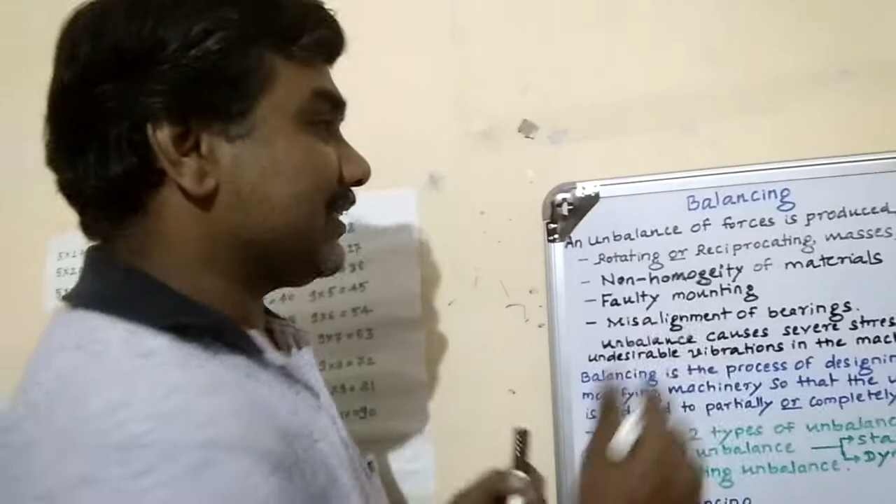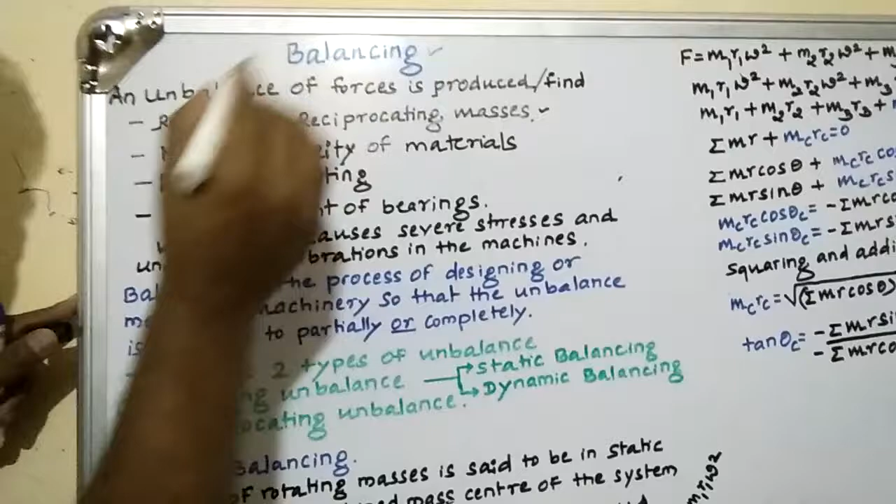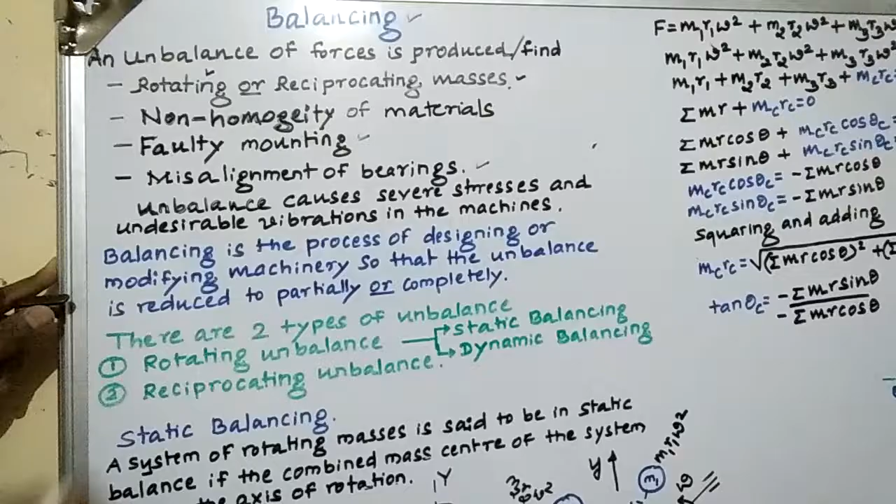An unbalance of forces is produced. We can find unbalanced forces in rotating or reciprocating masses, in both rotating and reciprocating masses. This is due to non-homogeneity of the material, that is also called unbalance. Then faulty mounting also causes unbalance. Misalignment of the bearings also causes unbalancing forces in the system.

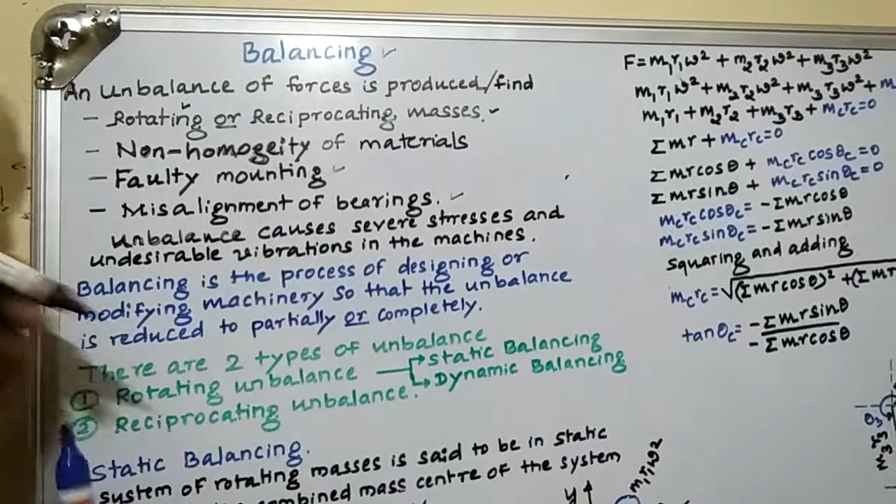Due to unbalance, it causes severe stresses in the system, and undesirable vibration in the machine. These are the main effects on the system due to unbalance - it creates stresses and it creates vibration in the machines.

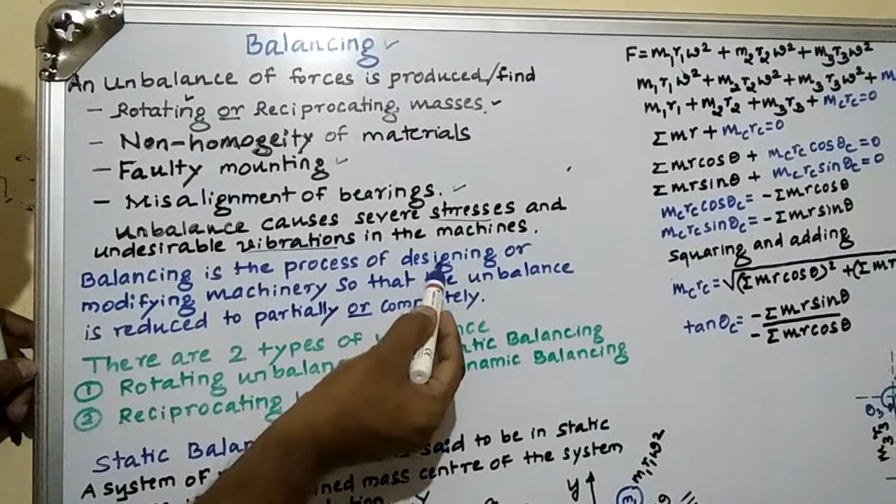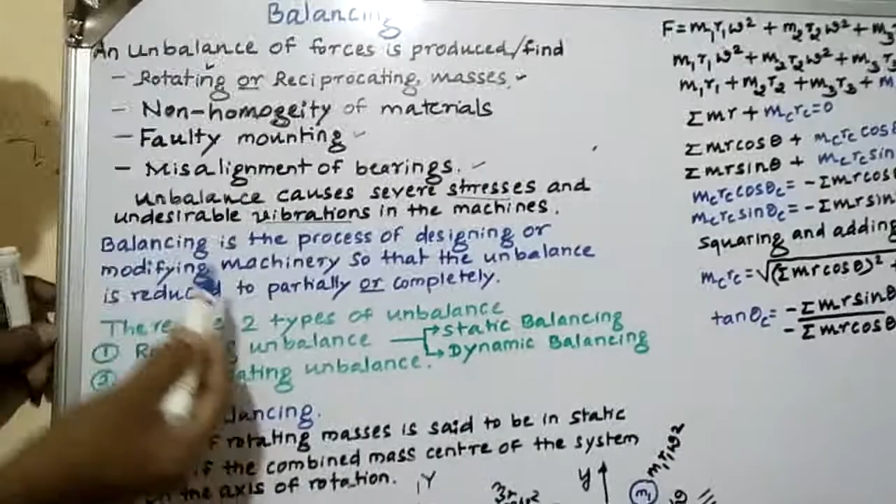What is the meaning of balancing? Balancing is the process of designing or modifying the machinery so that the unbalance is reduced partially or completely. As we cannot eliminate the total unbalance in the system 100%, we can only partially balance it. Some say we can balance the system completely also, some say this is partial.

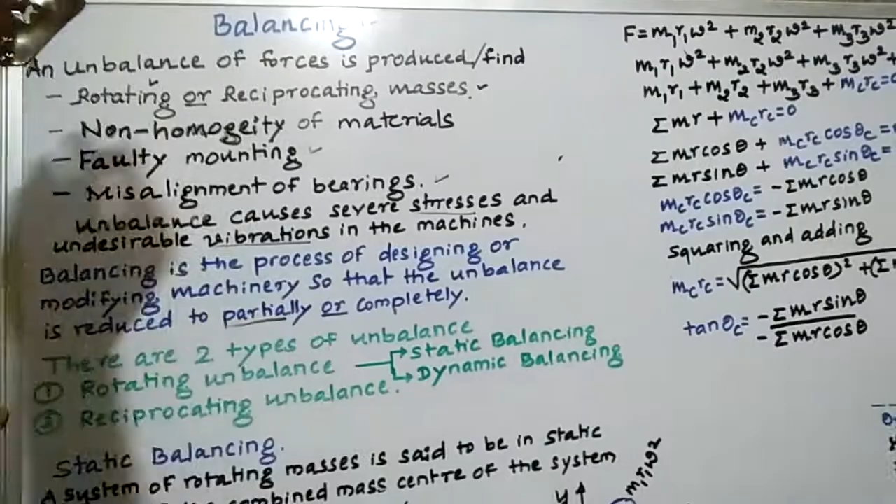There are two types of unbalancing. First one is rotating unbalancing. In that case, there is further classification - static balancing and dynamic balancing. Then one more classification is reciprocating unbalance. So in rotating unbalancing, there are two classifications, static and dynamic.

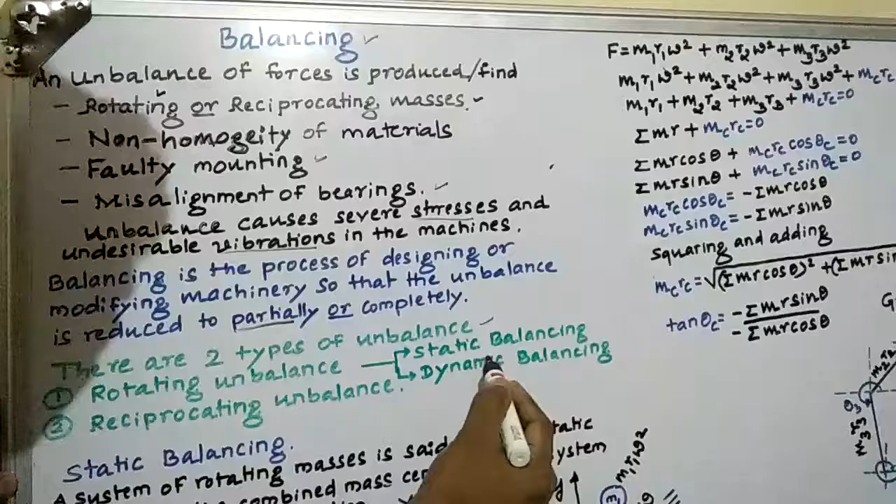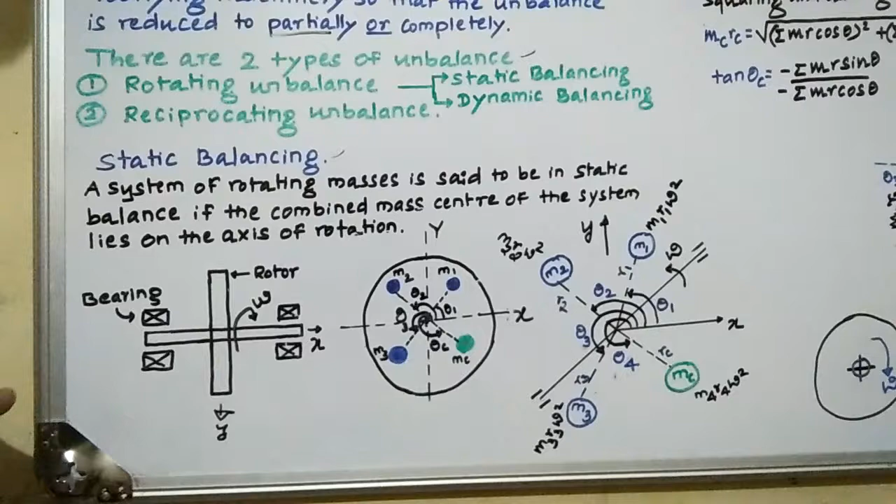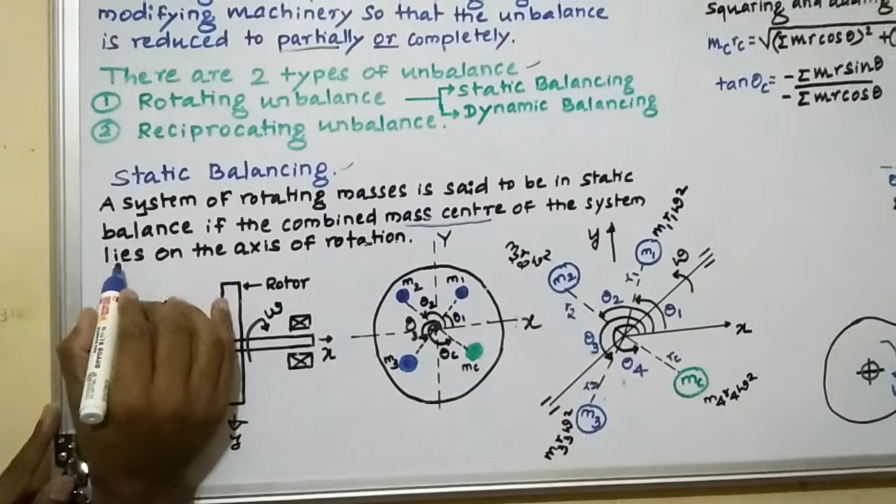What is the meaning of static balancing? A system of rotating masses is said to be statically balanced if the combined mass center of the system lies on the axis of rotation. In that case, we find two parameters - first is the mass center, and the second is that it lies on the axis of rotation.

When both are in the same axis, meaning both lie in the same axis, then you have to say that is static balancing.

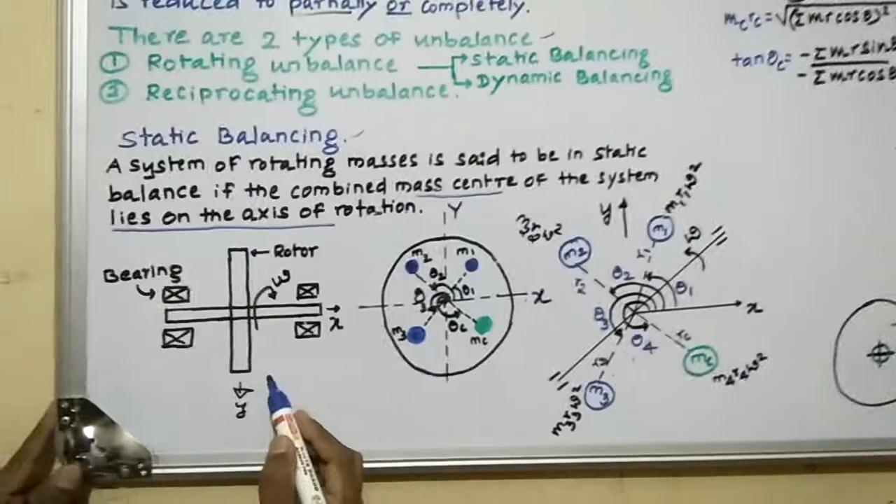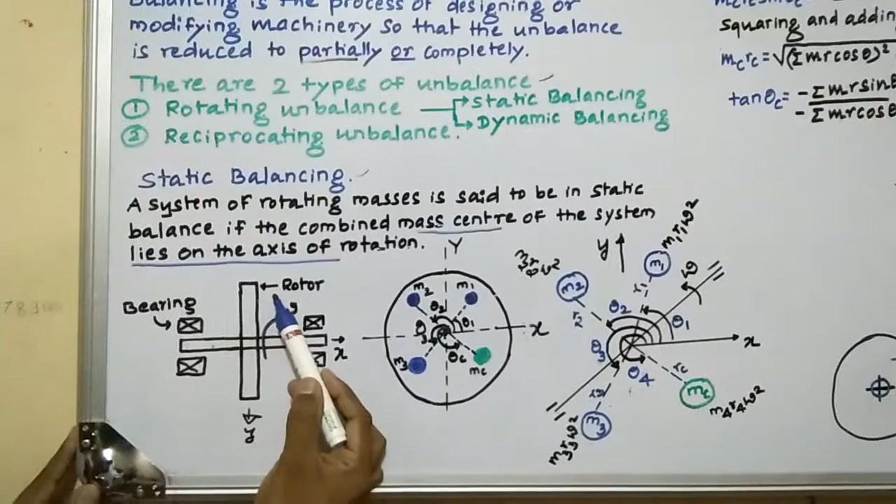Then I have taken a figure here. Look at this figure - I have taken this as a shaft, it rotates with a speed of omega. Then I have taken one more rotor, the speed is omega for this. At the end we find the bearing.

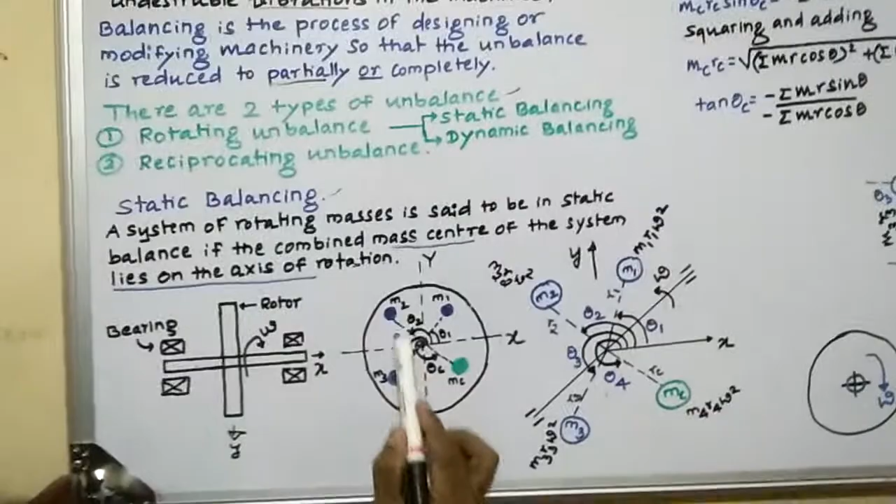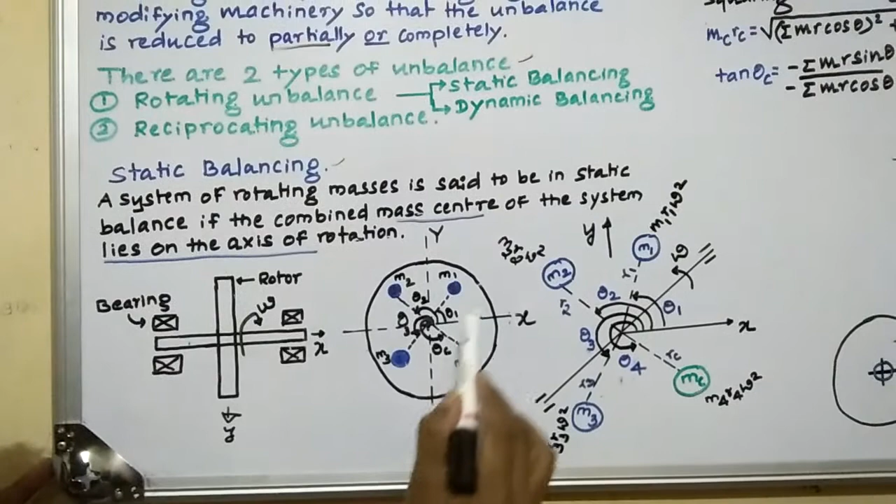Then I have taken a sectional view here. I have taken this as M1, M2, M3 - these are the extra masses we find in the rotor. Due to M1, M2 and M3, it creates an unbalance in the system. If it is unbalanced in the system, it again affects the bearing, causing an effect on the bearing, and finally the loss of the bearing will take place.

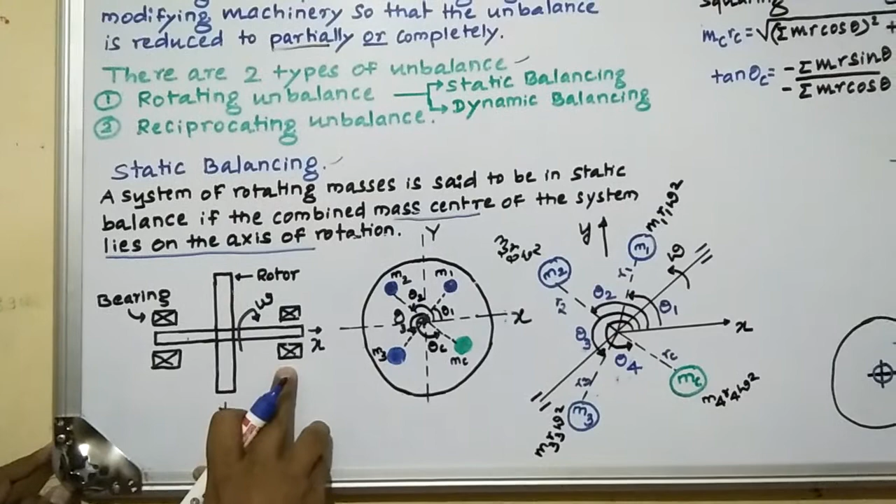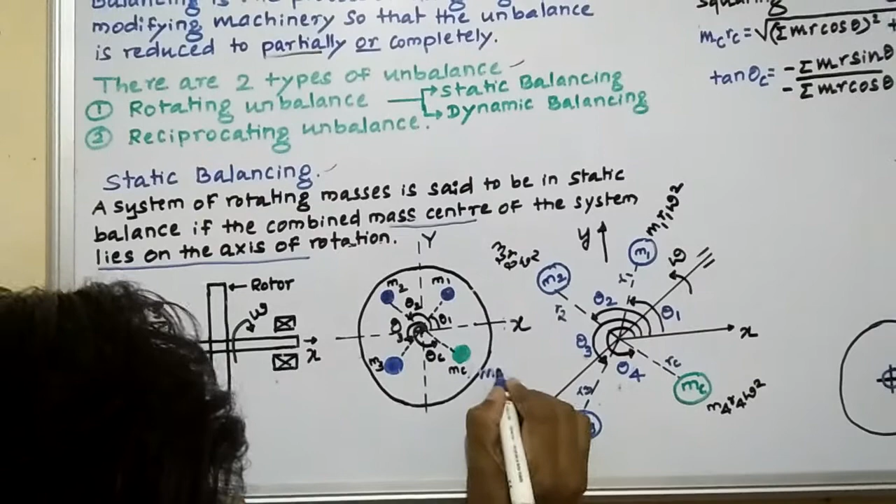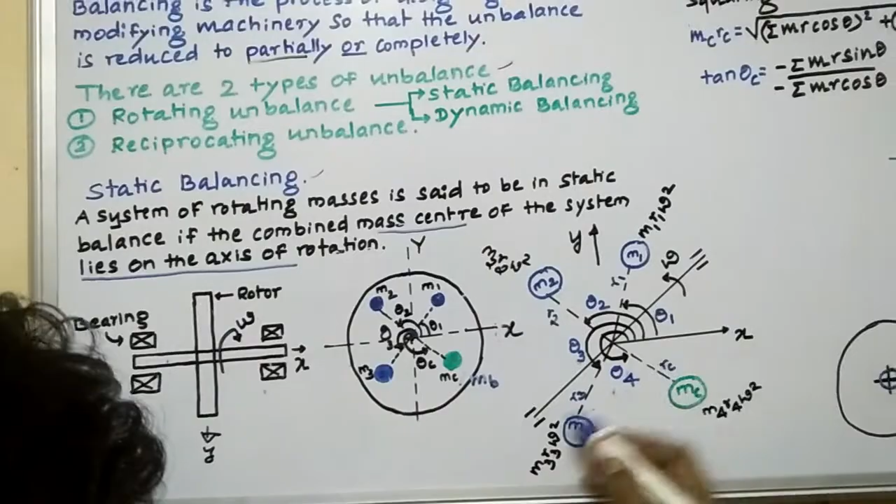In this case M1 is kept at a radius. I have taken a skeleton diagram here. One more thing, I have taken as MC - this is a counter mass, that is a balancing mass, also called MB, balancing mass. I will show some possibility here in this skeleton diagram. This is a bearing, at the end we find the bearing.

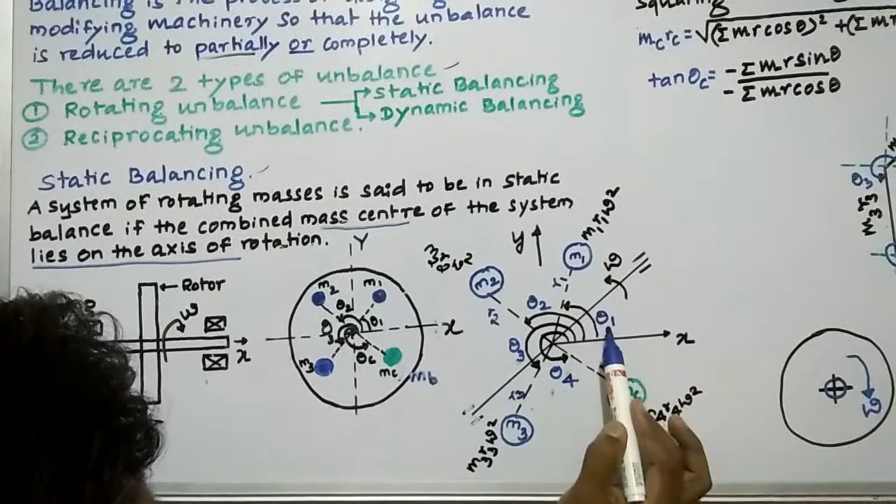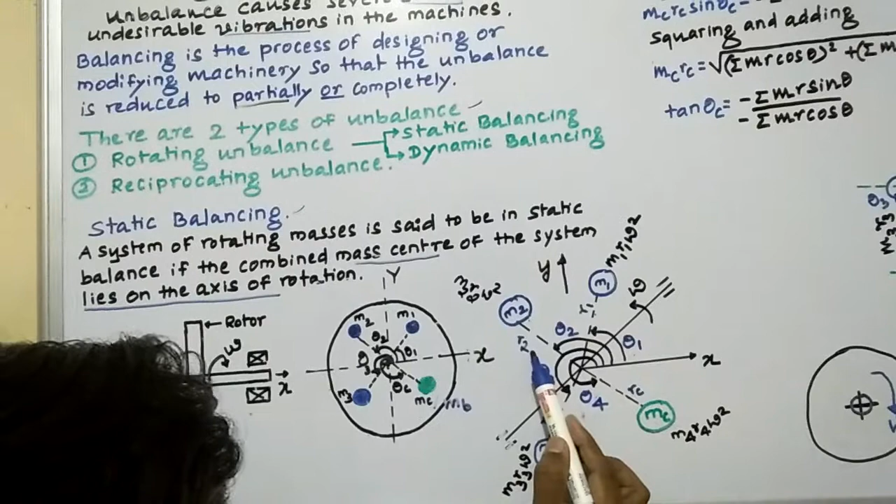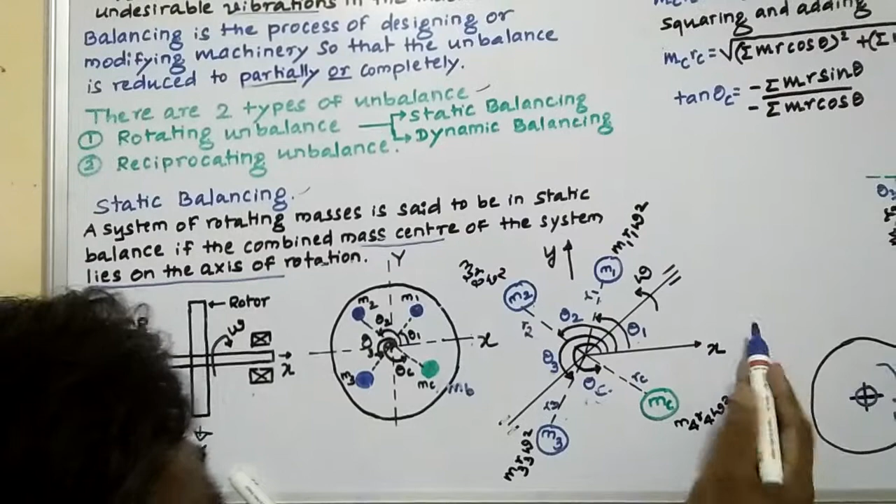I have taken some inclination to show the angle properly - M1, M2, M3, and the balancing mass or counter mass I have taken as MC. Look at this - the position of M1 makes an angle of theta 1 at a distance of R1. For M2 also, at a distance of R2, it makes an angle of theta 2. The third mass makes an angle of theta 3 at a distance of R3. The counter mass I have taken as theta c, at a distance of RC, with respect to the x-axis from this zero point.

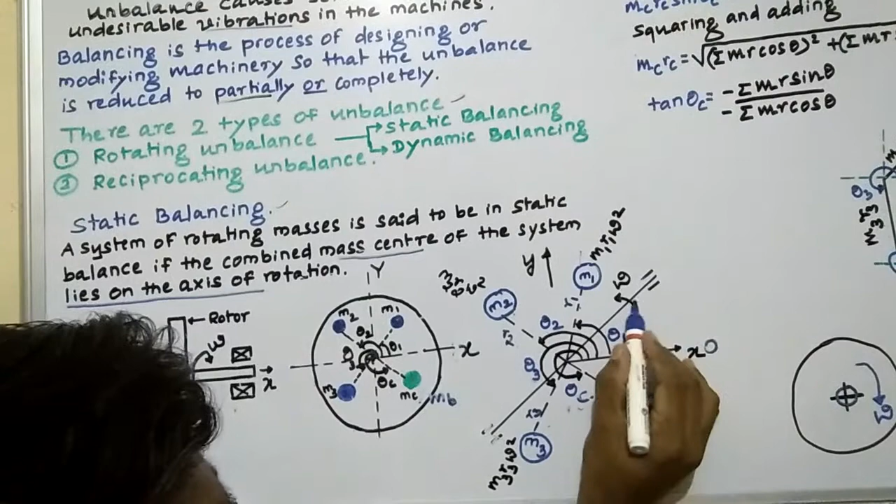Due to unbalancing, this is due to inertia force - this is rotating with a speed of omega, it will create a centrifugal force, that is M1 R1, the centrifugal force formula is MR omega square. For specific mass M1, M2, that is R1 omega square, the speed is the same so I have taken omega only. For M2 also, it will create the centrifugal force, that is M2 R2 omega square.

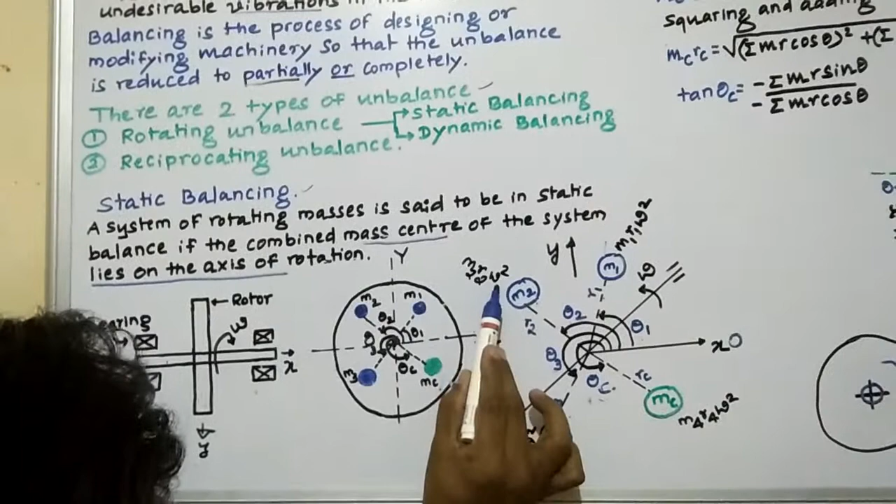Third one, that is M3 R3 omega square, this will also create a centrifugal force. Okay, then I went for this direction. This is the force. How many unbalanced forces have I taken here? F equal to sum of all the forces.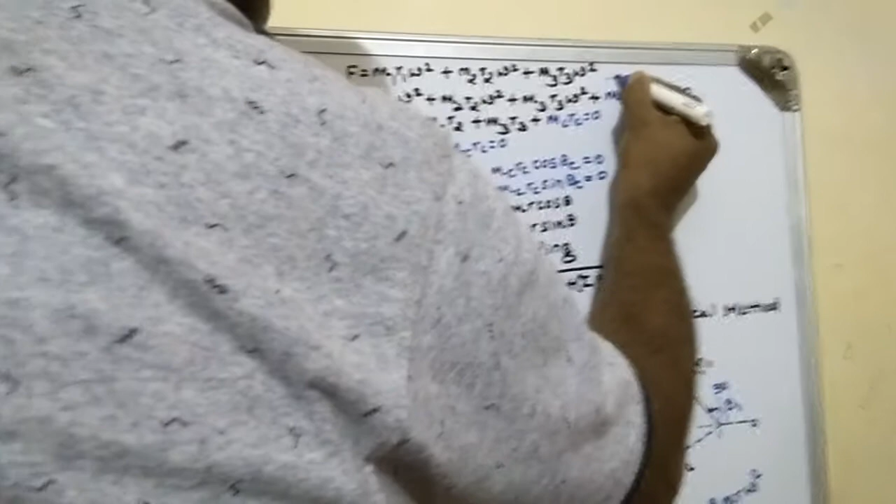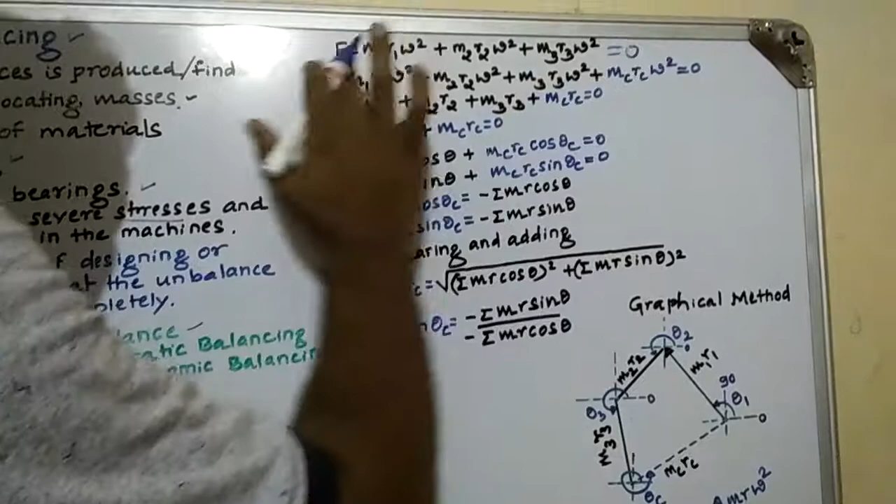If the sum of all the forces is equal to 0, it need not find the unbalancing force because the system is balanced. It is not necessary to go for the sum of the force equal to 0 to say that the system is balanced.

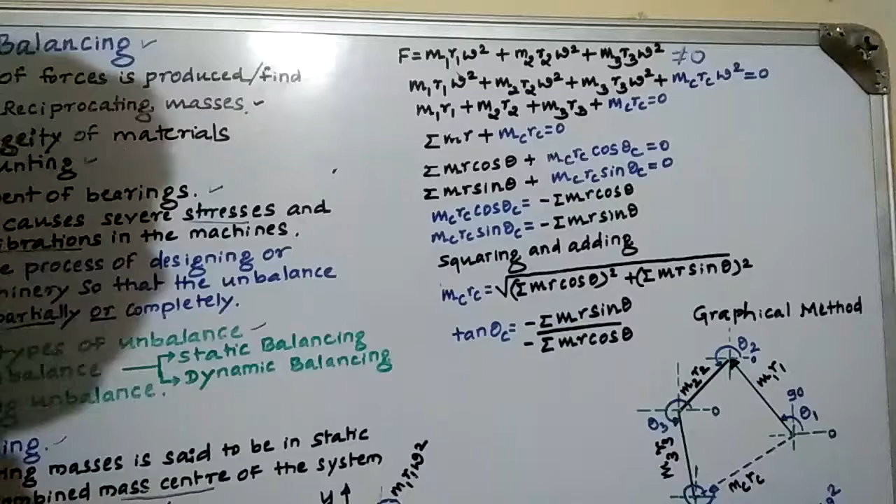If it is not equal to 0, you have to balance the system. In order to balance the system, you have to add weight, otherwise you have to remove material.

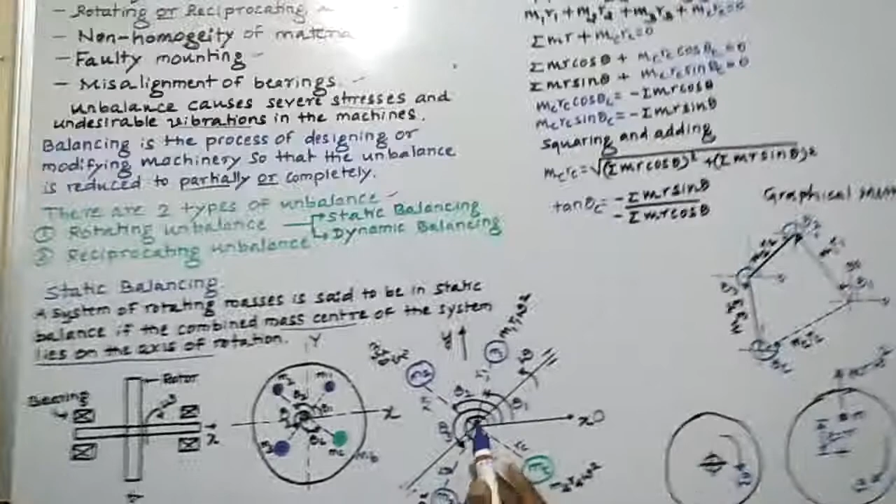In this case, look at this one. In order to balance this, I have taken a counter mass MC at a distance of RC at an angle of theta c.

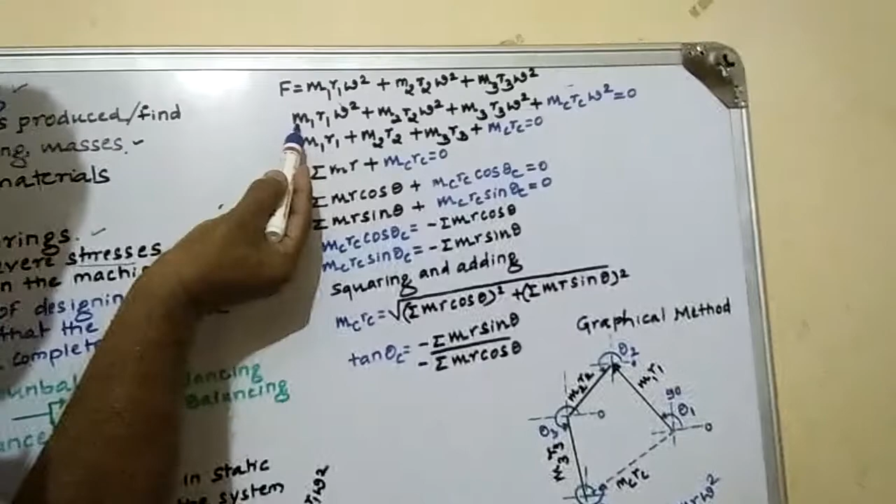Then look at the second equation. This is initially unbalanced, it is not equal to 0. Then how to make it equal to 0?

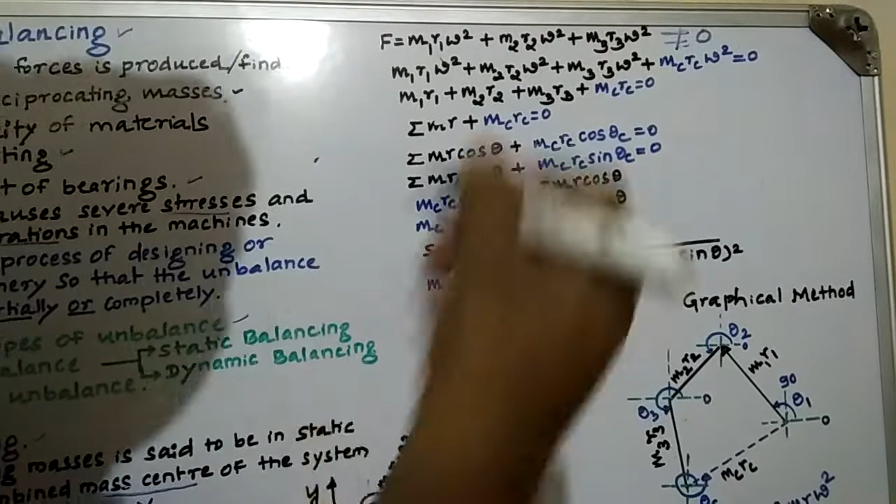You have to take some counter mass. I have taken a counter mass as MC RC omega square. Then it becomes equal to 0. Why is it equal to 0?

Because these three masses are the unbalanced masses. In order to make a balance, they are balanced by taking a counter mass MC at a distance of RC. Then it becomes 0.

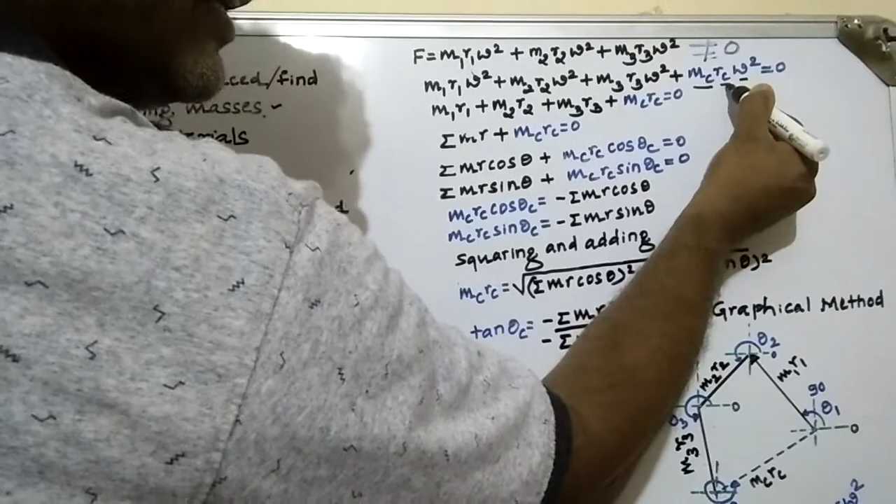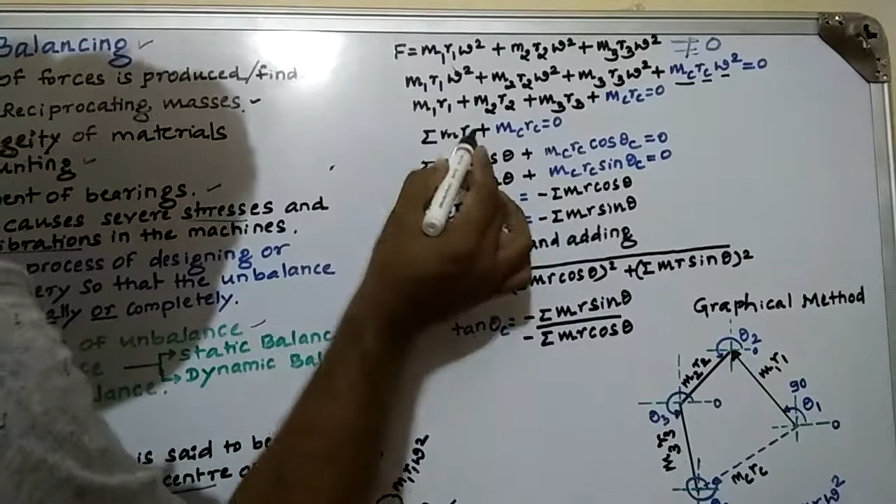Then look at that one. Omega, the speed, is common, so I have eliminated that. Then this is M1, M2, M3. I have taken the summation, that is summation of MR. The counter mass is a single one, that's why I have taken MCRC equal to 0.

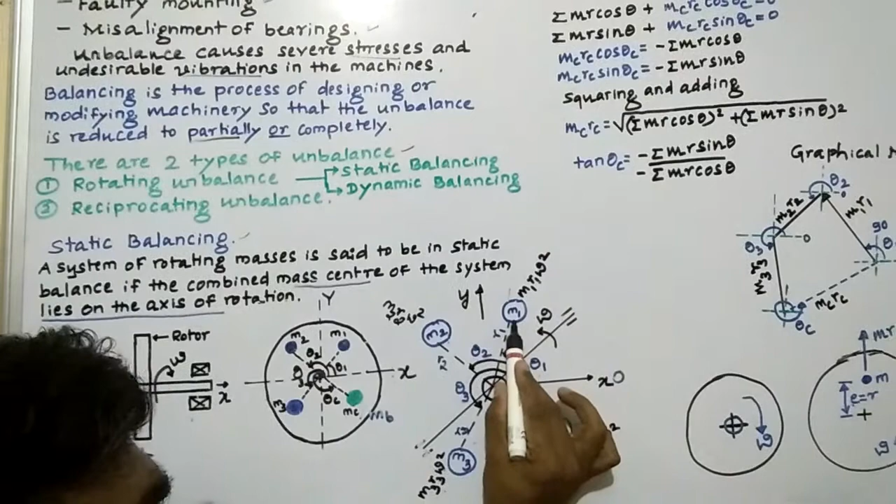Look at the figure, this is a skeleton figure. This is the x-axis, this is the y-axis. Mass M1 you have to resolve into vertical and horizontal direction. M2 also you have to resolve into vertical and horizontal direction. M3 also you have to resolve into vertical and horizontal direction.

That's why the counter mass also you have to resolve into vertical and horizontal. That's why, for the horizontal, I have taken the product of MR into cos theta. This is also for the counter mass, I have taken cos theta c.

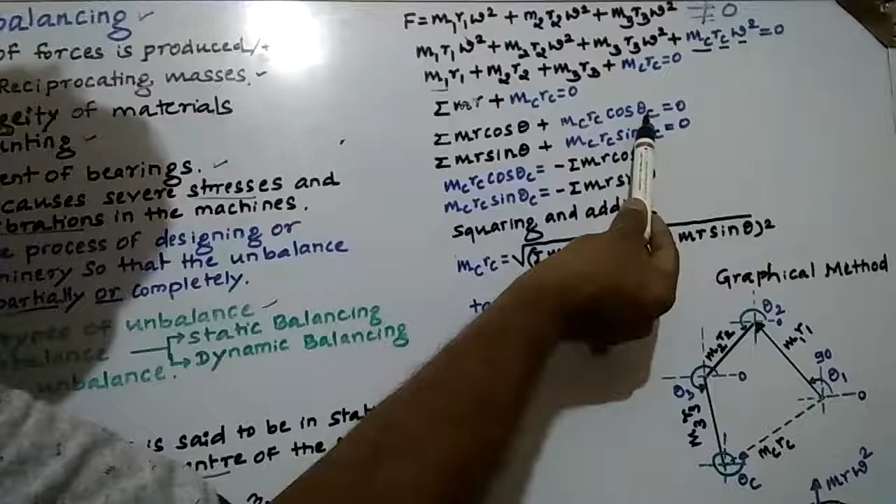Theta c is nothing but the angle subtended by the counter mass. This I have also taken in sin theta, and the counter mass is done in this way.

Then I have taken this as the right hand side, that is the summation of the masses on the right hand side. The next step is squaring and adding.

We square and add, and the minus minus goes away. Then finally this also comes as a square. Squaring means this product also comes as a square, this also comes as a square. Then cos square theta, sin square theta comes as 1.

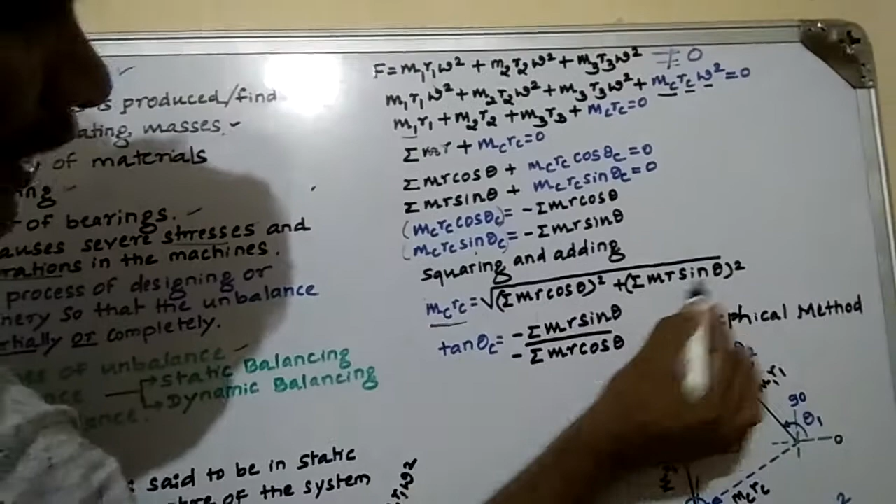Here also this becomes, the remaining is MCRC. Then MCRC, the square will be there, it comes under the square root of summation of MR cos theta whole square plus summation of MR sin theta whole square, under the root.

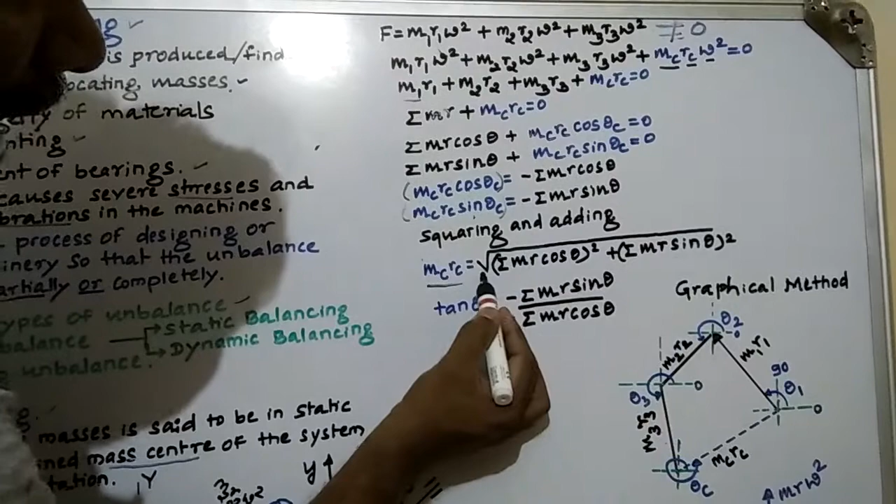For the angle, in order to determine the position of angle theta c, you have to go for tan theta equal to sin theta divided by cos theta. Sin theta is as usual MR sin theta, then MR cos theta, it comes. These two signs you need to determine the quadrant, that is the position, which quadrant that comes.

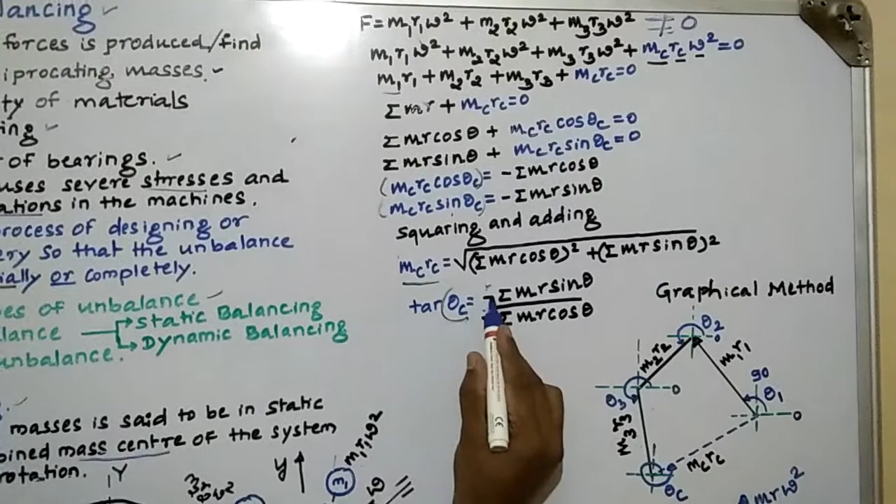That's why you have to keep this minus. In order to determine the position, you need the minus. Okay, then this is the solution I went through, this is the analytical method.

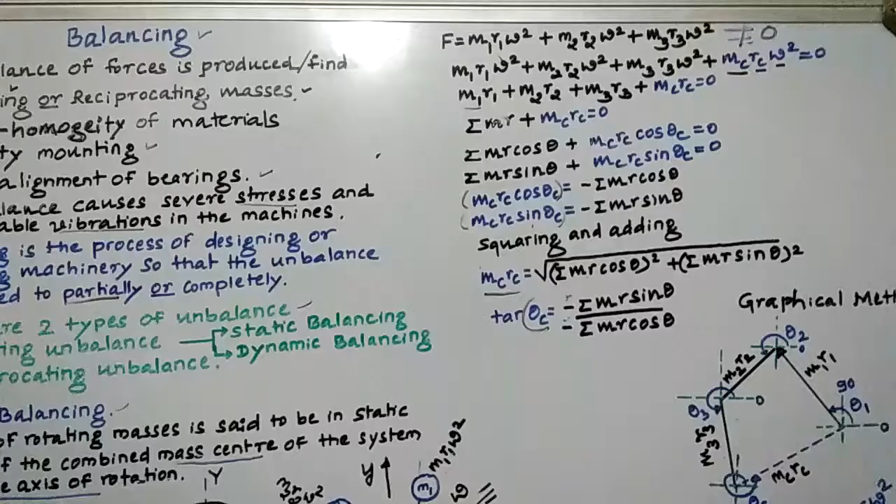Static balancing we can solve by two methods. One is the analytical method, one is the graphical method. In graphical method, look at this one, we'll get the same result.

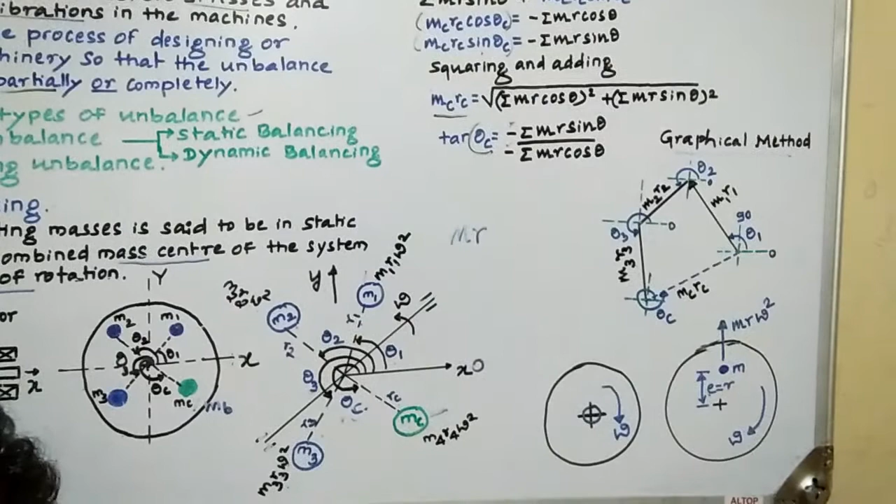Look at that one, you have to find the product MR, that is the mass of the unbalanced mass. You have to find MR, that is M1 R1, M2 R2, M3 R3, all the unbalanced masses you have to calculate. If it is M1, I'll draw here only M1 R1, this is M1 R1, it makes an angle of some theta, theta 1.

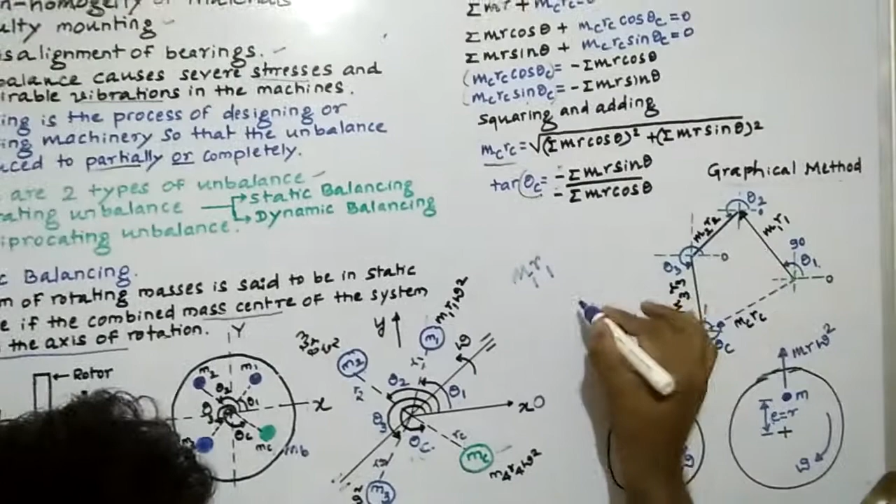Okay, you got some theta 1. Then M2 R2, I have taken here also, this also makes some angle, this is M2 R2. You have to draw it with the respective angle.

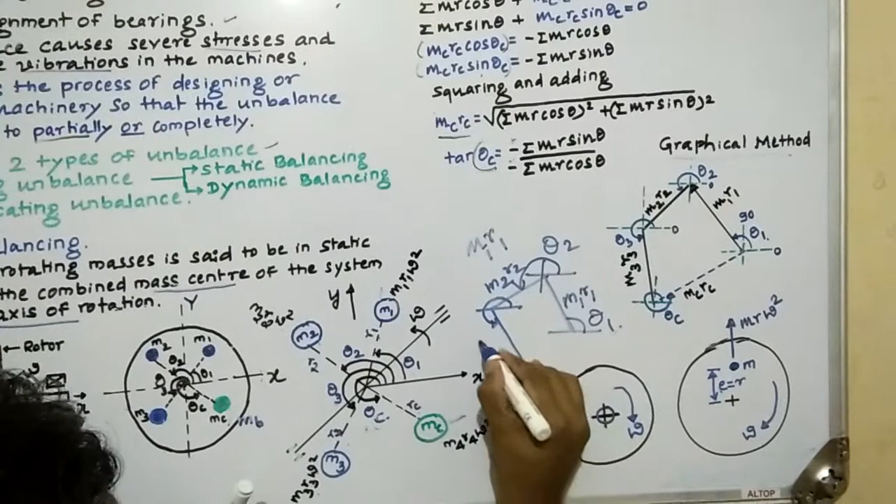This is theta 1, this is theta 2. The third one, m3 r3, also makes some angle with respect to horizontal. You have to go this way. This is m3 r3. Okay, this is unbalanced.

Then look at this one. This is a loop, but it's not complete. When the loop is complete, you have to say that it is static balancing. In order to make the loop a static balancing, you have to join this resultant. I will take this one and join it. This is nothing but the counter mass, MCRC.

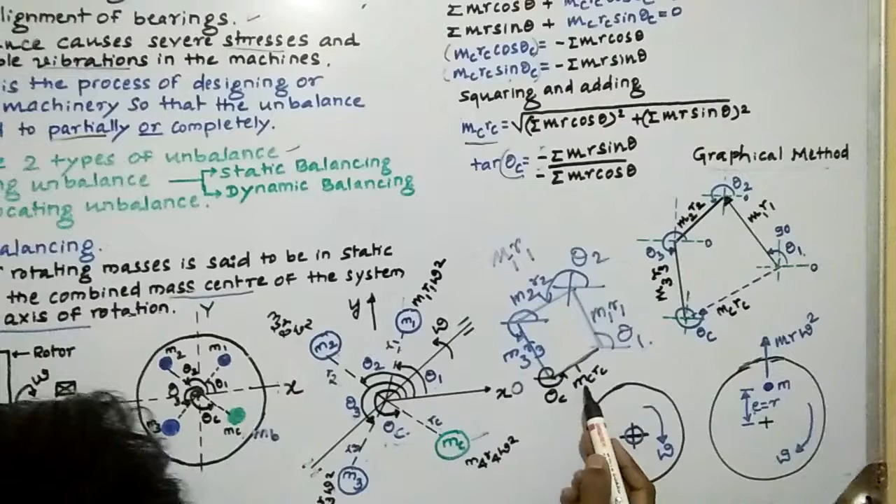We can measure the angle also, you can get theta c also. We can determine this one. This is the graphical method. We can find it using a graphical method also, or an analytical method also.

Look at this, I made this here only. I have taken m1 r1, which makes some angle theta 1. m2 r2 makes the angle theta 2. You have to measure with respect to the x-axis.

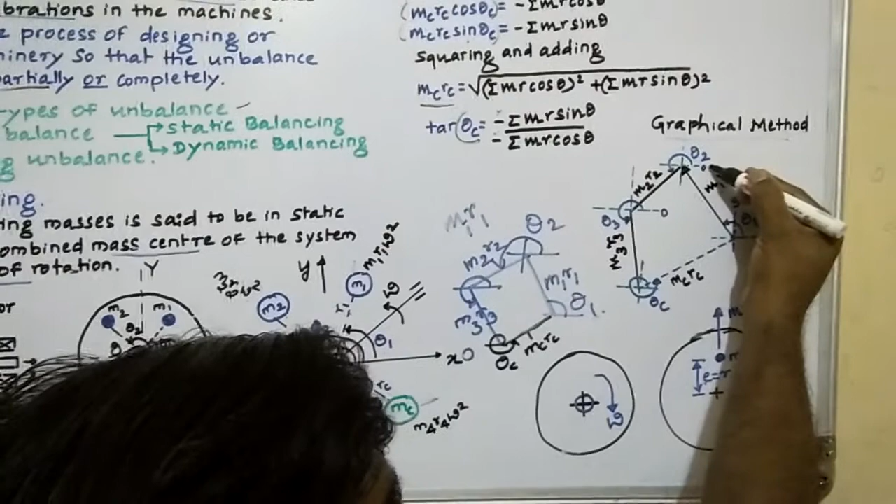This is 0, you have to start from 0. Here also you have to take from 0. That is theta 2. For theta 3 also, m3 r3, theta 3 comes as shown. Then this is the counter mass.

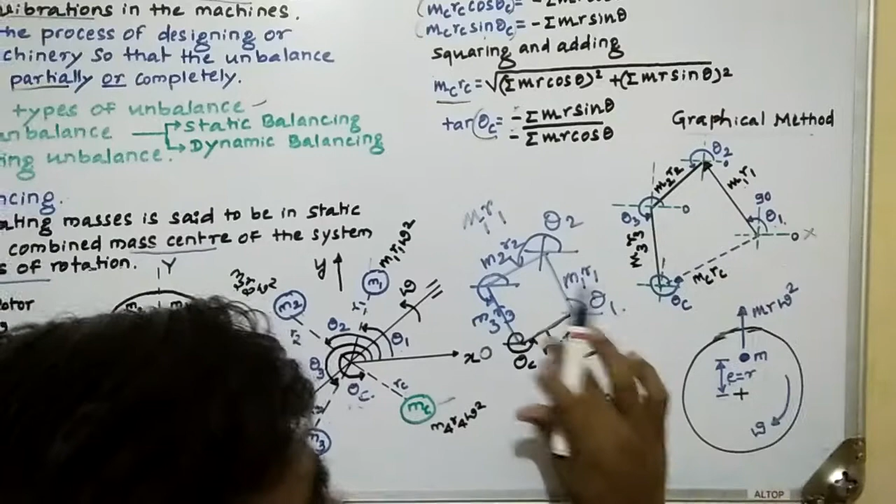Whatever dotted line I have written here also, this is a dotted line. Here also dotted only. This MCRC, both are the same. Here you have to use the dotted line, because force also you can represent in the form of a vector. Clear, what I am saying?

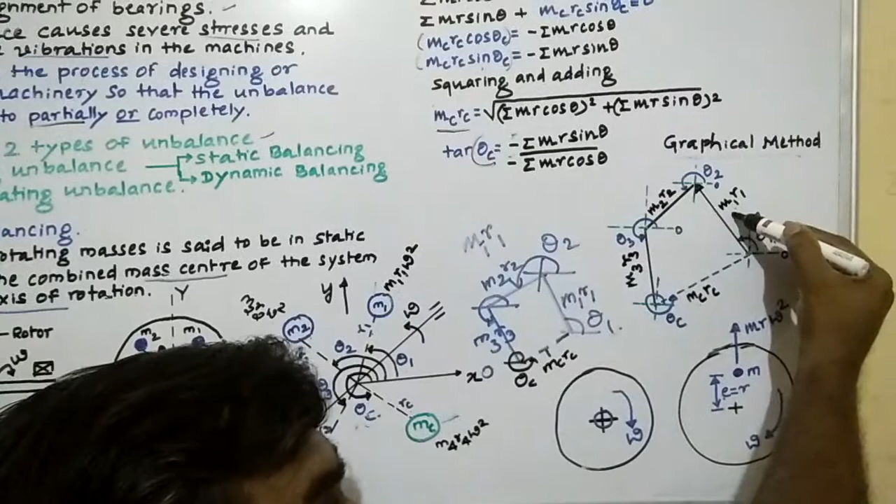Velocity also you can represent in the form of a vector. Force also you can represent as a vector. Acceleration also you can represent in the form of a vector. Here also I am representing a force, that is the centrifugal force, in the form of a vector. Okay, I complete this, this is the graphical method. This is the analytical method.

Then what is the meaning of unbalanced? I clearly say this. Look at this one: mass center and axis of rotation. I have taken this as the first figure. You look at this one.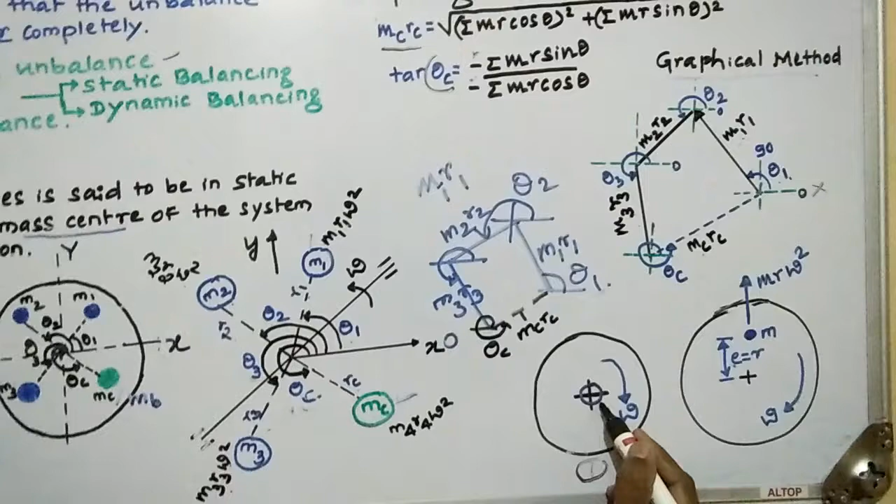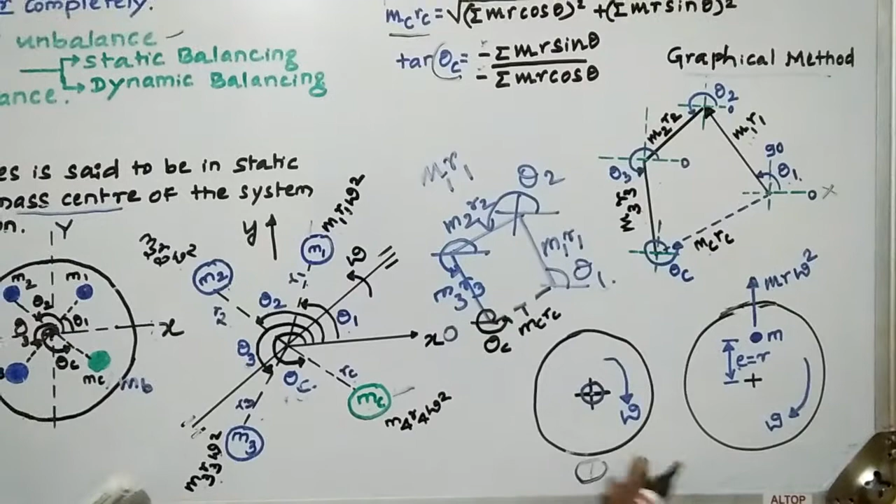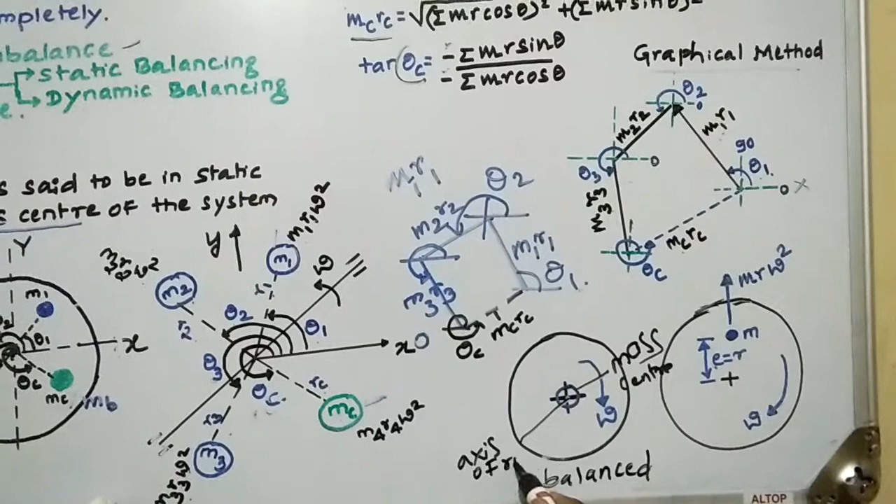I have taken this blue as the mass center. The plus sign is the axis of rotation. Both are coaxial, then this first one is a balanced one. Because mass center and axis of rotation, both are at the mass center. I have taken this one as mass center. The plus sign is the axis of rotation. Look at this, both are coaxial, then this system is balanced.

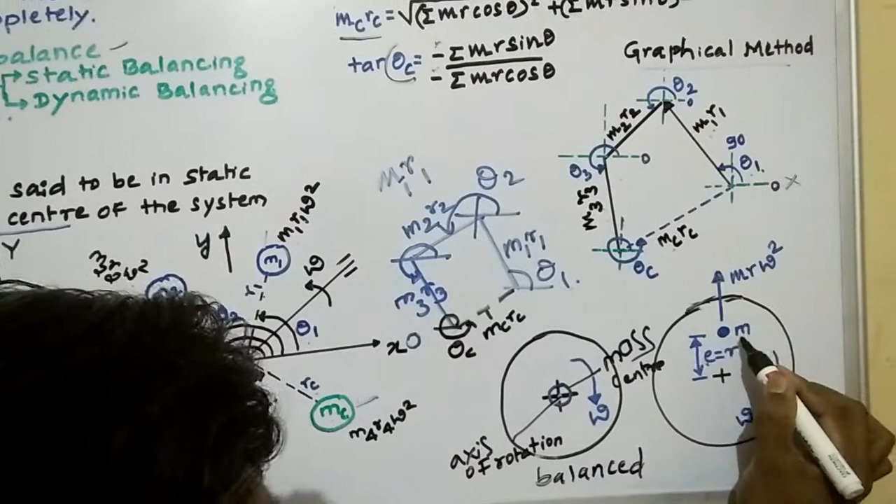Okay, look at this second figure. Here we will find the extra mass, that is m. Yet the axis of rotation is here now. Plus sign is here, axis of rotation. Due to this eccentricity, mass center will not be there here. Mass center will not be found at the axis of rotation.

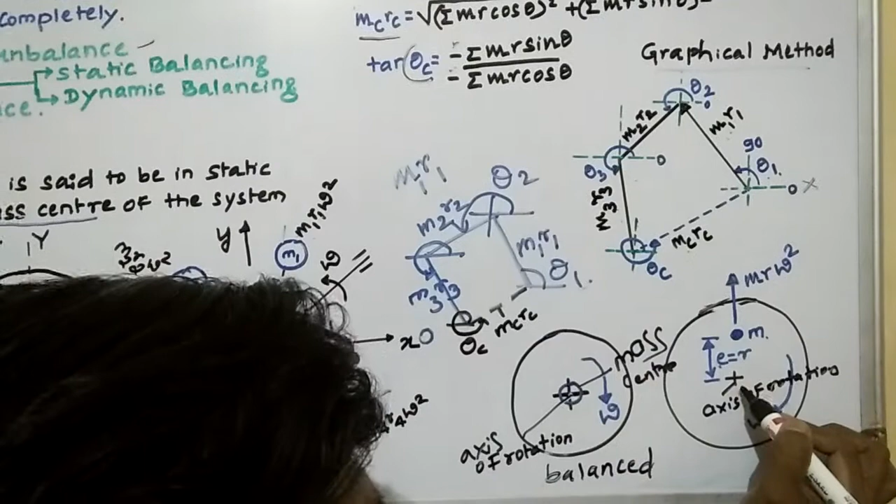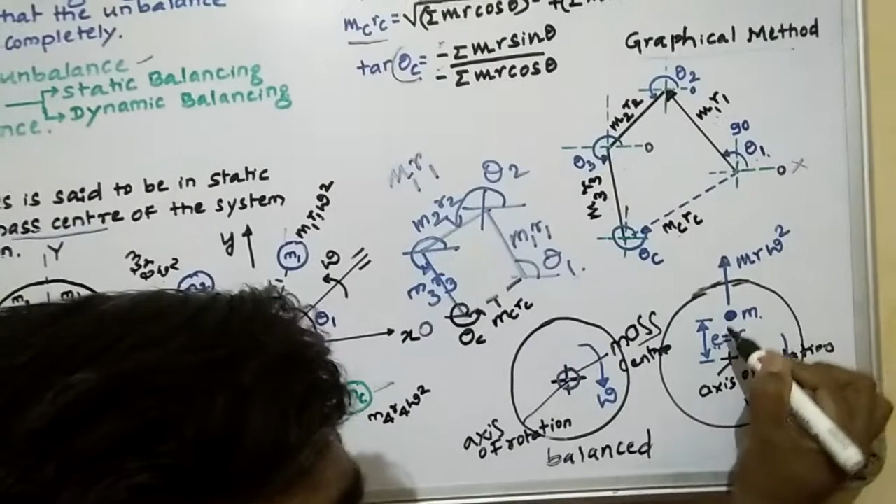Due to this extra mass at the distance of E or R, this extra mass is rotating with omega. This extra mass will create a centrifugal force. It tries to move outwards. Due to this, the force creates an unbalanced force.

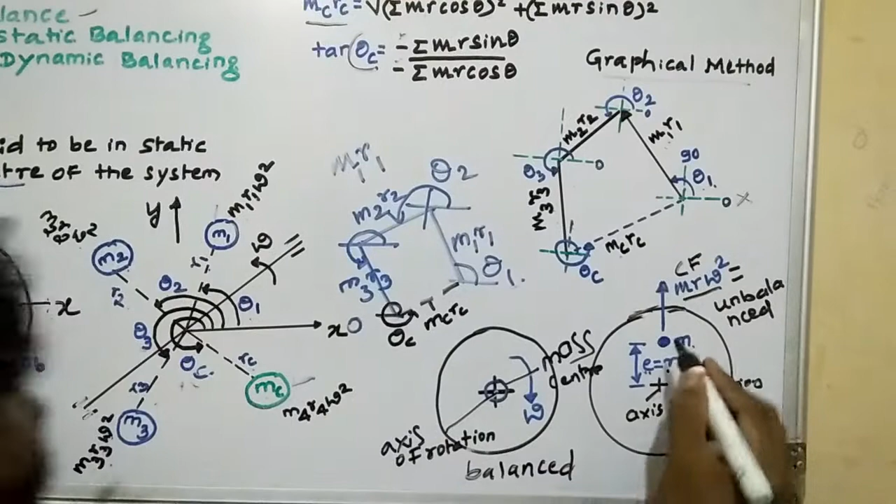Because here, look at this figure, due to this extra mass, the mass center may be here. The axis of rotation, both are not coaxial, then it will create an unbalanced force. This is not a balanced one, this is unbalanced. The second figure shows the unbalanced case.

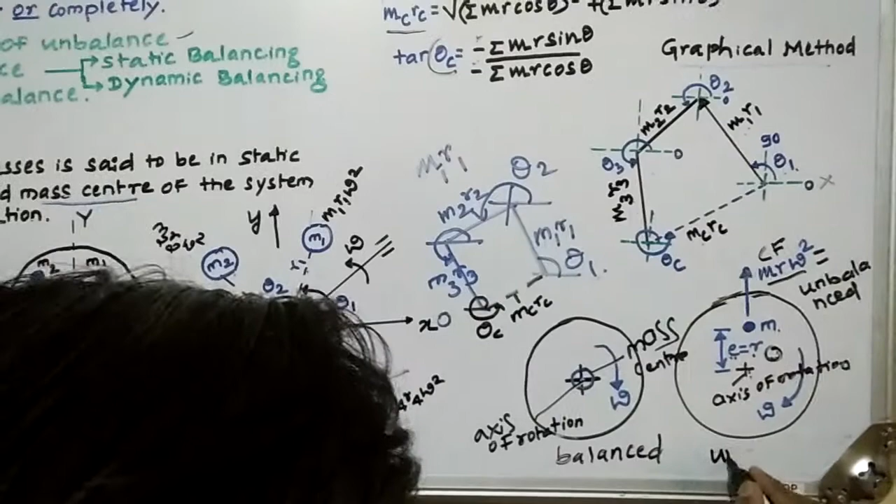Okay, I will show one simple example. Look at this one, I will take one notebook here. Here I will take this as the axis of rotation, I will take it as my thumb. The mass center for this notebook is exactly at the center, and the axis of rotation I have taken as the thumb. It rotates properly, look at this one.

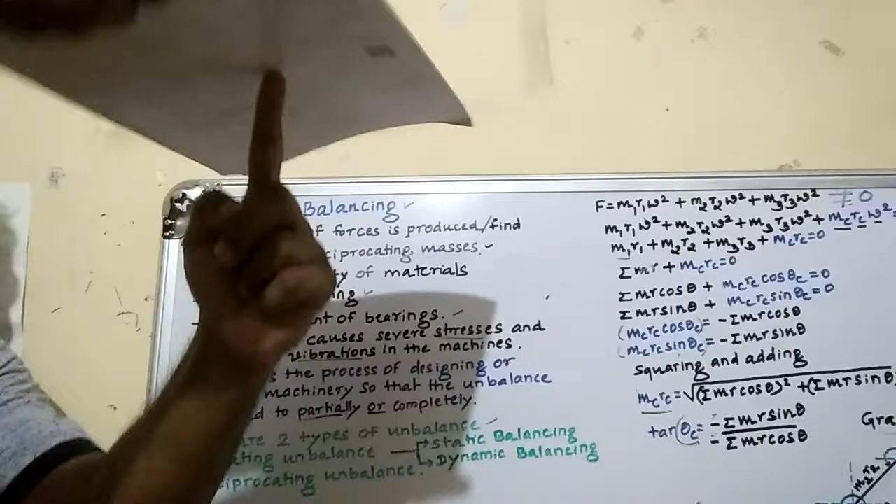Consider, if you consider the axis of rotation here now, it will not rotate properly because the mass center is not at this point. The mass center of this notebook is at the center, the axis of rotation is also at the center, so it rotates properly. Okay, that is nothing but static balancing.

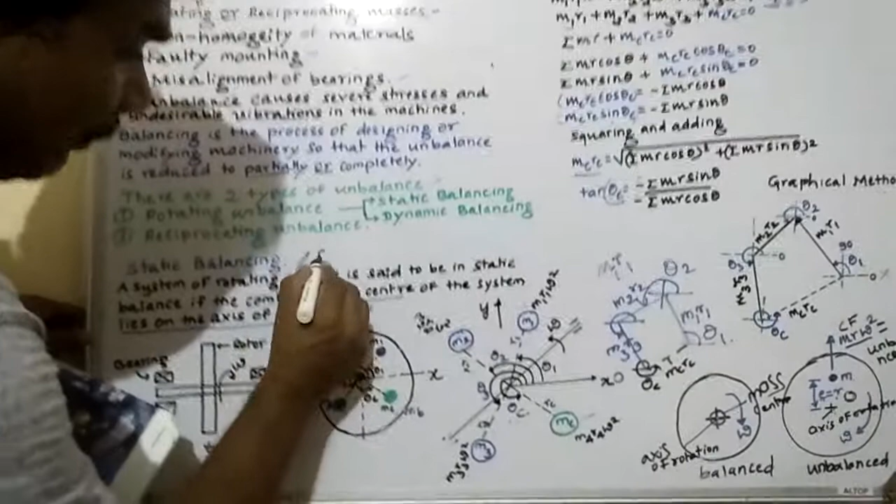One more thing for static balancing, that comes as a single plane. That is the main difference, we find static balance in a single plane. Look at this one, this is a rotor, you have to treat it as one single plane. That rotor also you have to consider as a single plane. I hope that you got it.

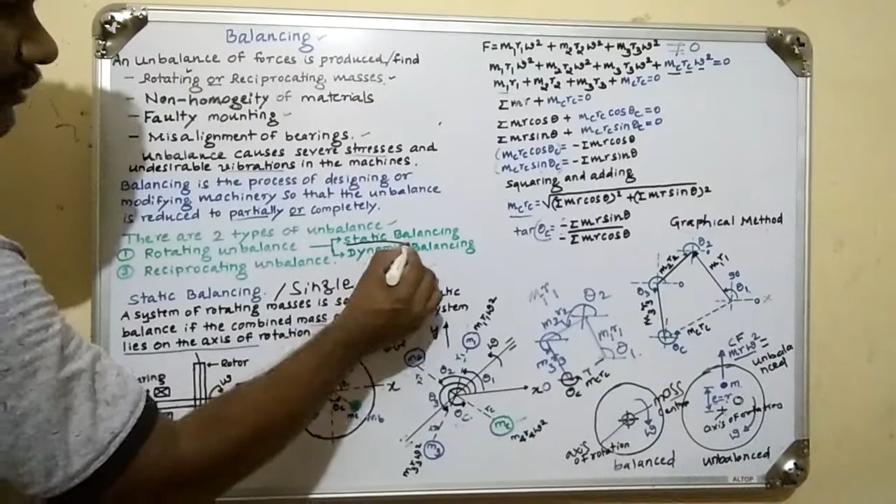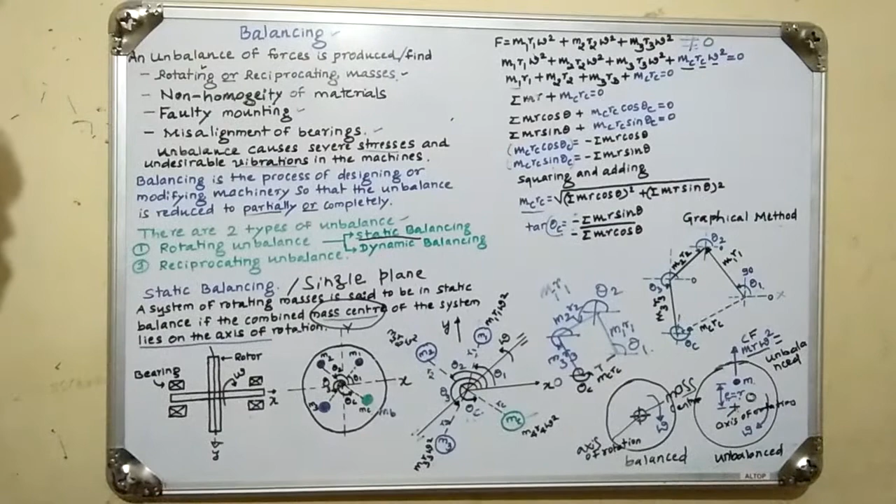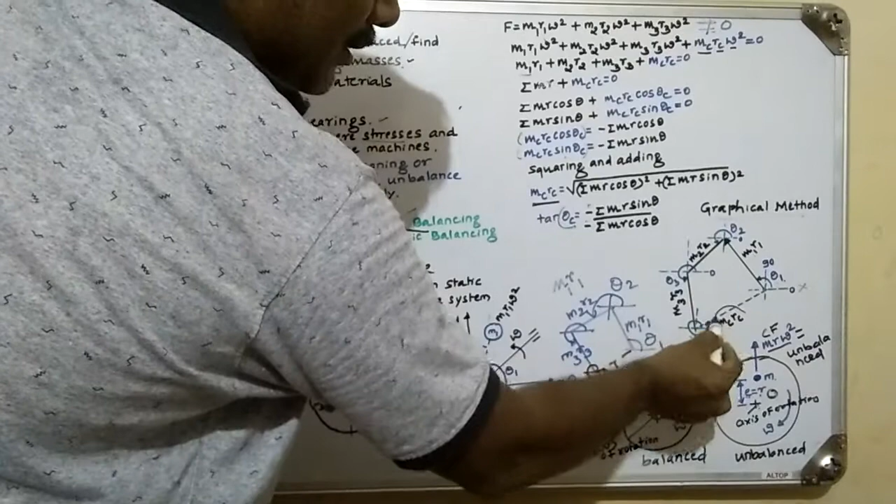Next class I will go to dynamic balancing. Today I completed static balancing. In that case, you have to remember the mass center and axis of rotation both should be coaxial, then only you can say that is static balancing. We can find the unbalanced mass using the analytical method also, MCRC. One more method is using a graphical method also. When you compare the analytical method, the graphical method is better, easier to solve to find the counter mass. Okay, I stop here.